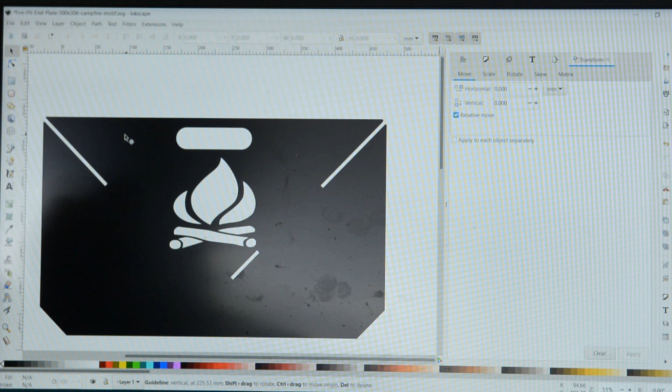It's got a cutout for a little flame, just gives a light through the end and also gives a bit of air in the end. These are the slots for the tangs on the sides to fit in, and this measures 500 by 306. So there'll be 2 of these the same, and I'll just show you now what the sides look like.

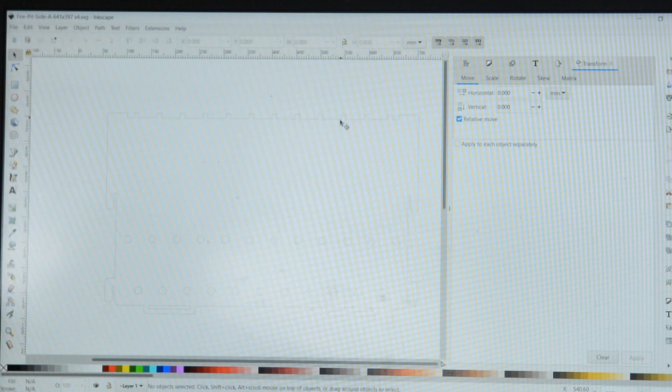Now this is the side. One side has got these slots in the bottom, and the other side plate has got a finger that actually goes in those slots, so they lock it in. And we have a row of holes which will be air holes above the grate that fits in here, and this is a row of air holes below the grate. And you'll see across the top this little castellated section that locks into the grill, and I'll show you that.

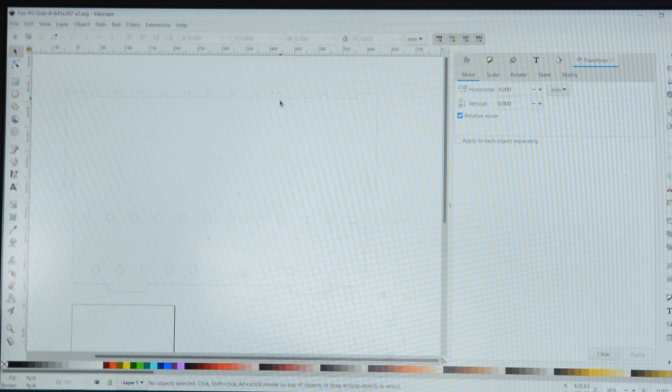Alright, now this is the other side, and it's only got one little finger on each side, and it has this little piece on the bottom that fits into the slot on the other side. The air holes are the same, and the castellated top section is the same, and it's what locates the grill. This is the grate, and the grate is 580 long, 150 wide, and it's got a series of slots in it. And as I showed you on the side, this fits in between those 2 rows of air holes.

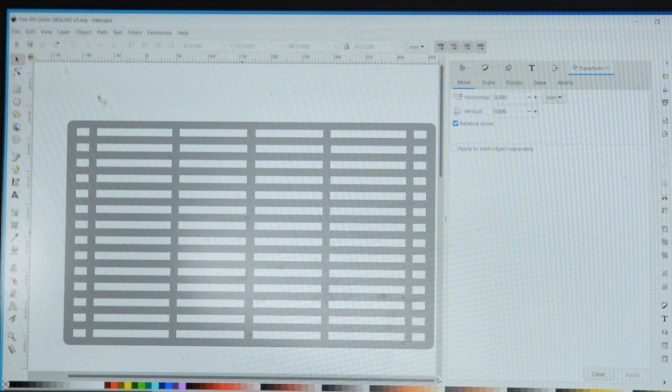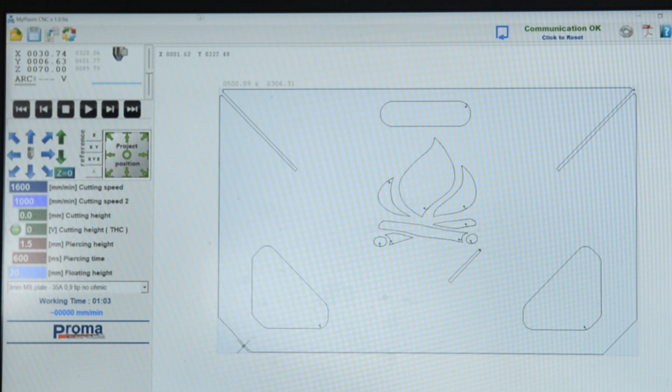So I'll just bring the first one into the software that we're going to be using, and this is the MyPlasm software that I use to run the plasma table. This is the end plate, and it's size 500 by 306, and these little dots and lead-ins tell me where it's going to start the cut from. It'll cut each of those in turn, does all the internal cuts first, and then it goes around the outside and cuts out. And I've got to cut 2, so I'll just cut 1 to start with and just confirm the sizing, and then we'll go and cut the rest.

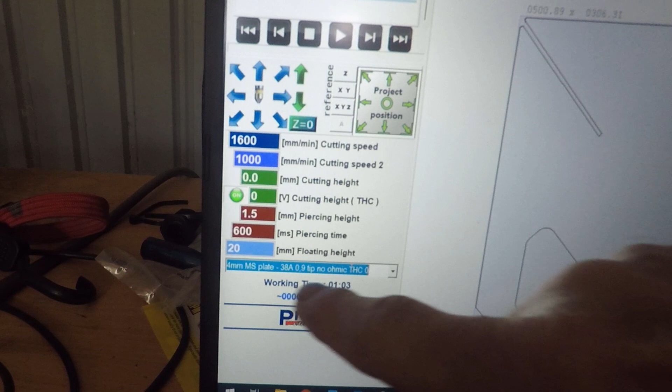And these are my settings for this first end plate, 1600 millimeters a minute. The second cut, which is the slowest speed for a hole. Cut height is set to 0 because that's the clearance I'm using on the torch. And I've got it set here at 38 amps on the cutter. And we'll hit the start button and away we go.

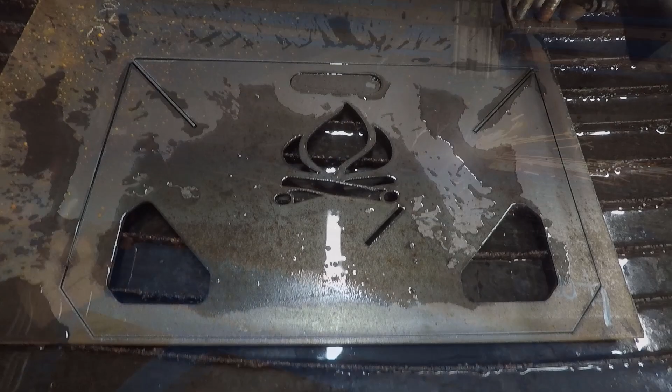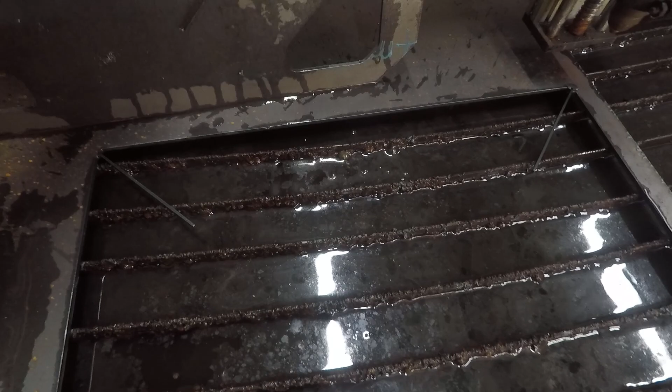And there's the first end plate cut out. I can grab that. So, look at that. Now there's the end plate. And we'll get on and cut all the others out, and I'll show you how it looks when it all goes together.

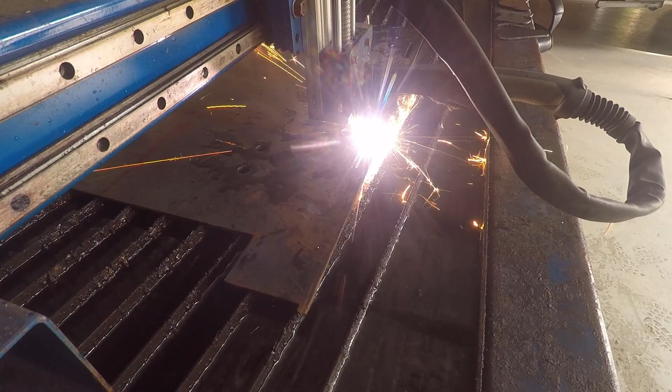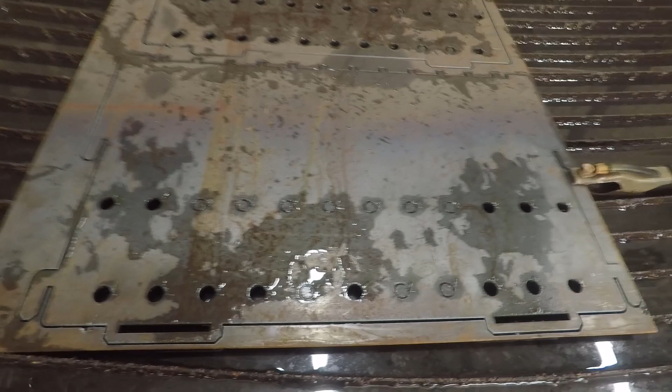So these are the two side plates. As you can see, this one here has got the little cutout, and this other side has got the little finger that goes in it. So I'll just lift those out of the table. I've got to put a new sheet on to cut the last little piece out, and we'll get it cleaned up.

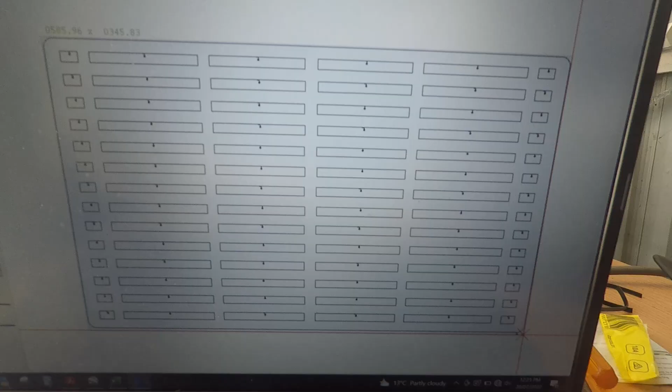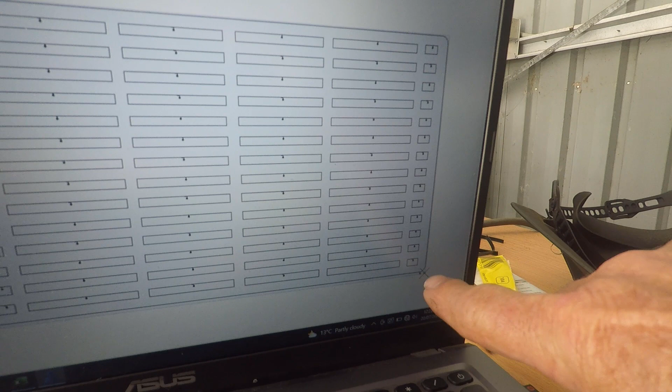Okay, so the last piece to cut is this grate that fits in the bottom, and it's 585 by 345, and settings haven't changed. So I've lined it all up. I told the torch where it is in this bottom right hand corner over here. So that's where the torch is. So yeah, just a matter now of hit the start button and last cut.

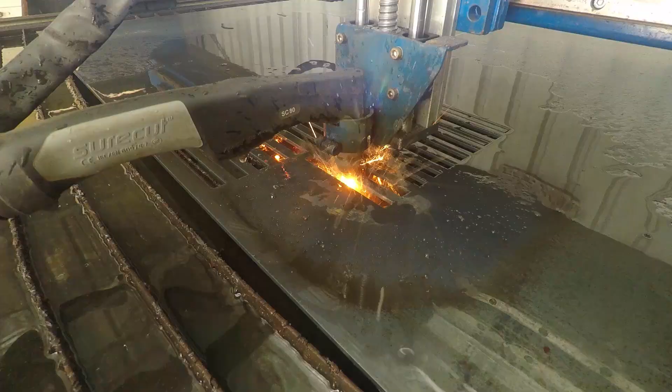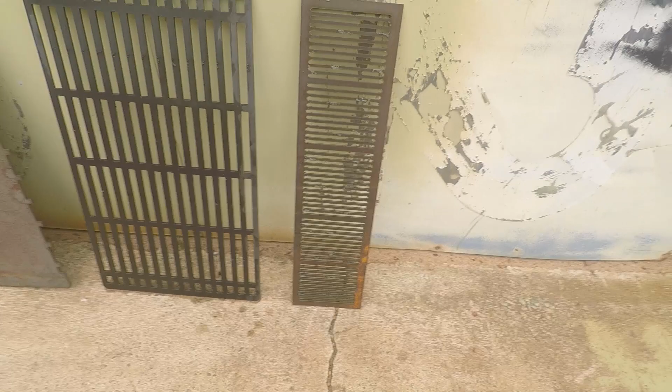And there are all the 6 pieces cut now, your 2 end plates and the 2 side plates, and this is the grill plate that fits on top, and that's the grate that goes in the bottom. So I'll get them on the bench, and I'll give them a clean up, and I'll show you how it looks all assembled.

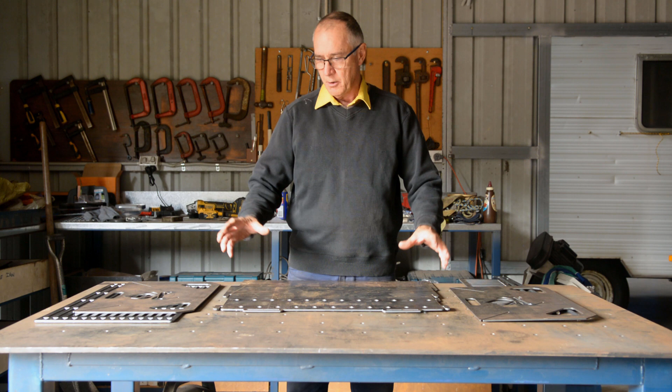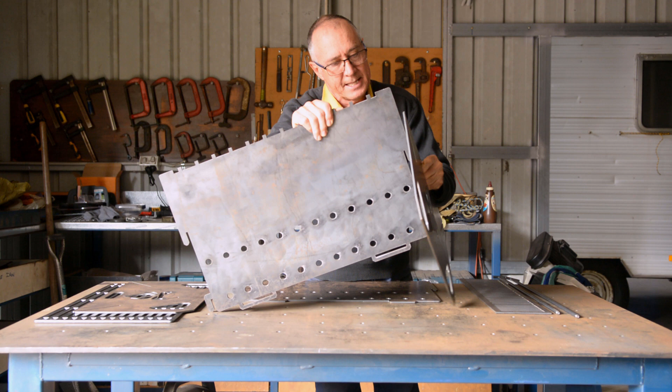So now that the 6 pieces of the fire pit are cleaned, ready to go, I'm just going to show you how to put it together. It's actually quite easy. As I said, one side's got the 2 fingers on it, and it's got the slot for the finger on the other side. So you take the end plate that's got the 2 slots on it, and it's just a matter of putting that in there, dropping it in. Do the same on this side. So you just drop that in there.

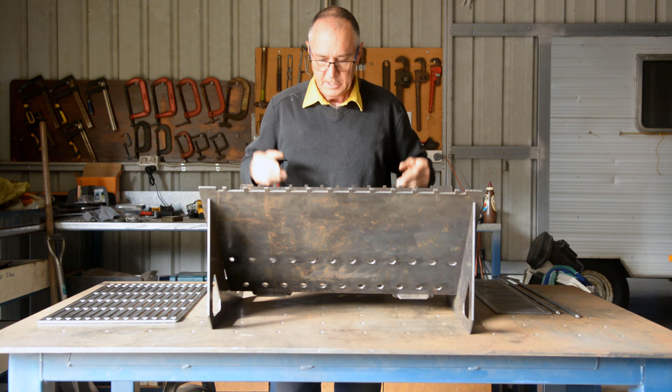Now this second plate has these 2 little fingers, I guess, and I only got the 1 slot on the side to go in here, and the finger slot in the bottom. And then the fire grate sits in between these 2 rows of holes. What I've made is these 2 long skewers, and what they do, I'll just turn this around for you. Sorry about the noise.

You see on the end, these 2 holes here happen to be the perfect height to rest the grate on. So I've made these skewers, pegs, and if I put them, without dropping it, through here and out the other side, and it's got a little T on the end to stop it falling out, do the same on this side. Gives the fire grate something to rest on.

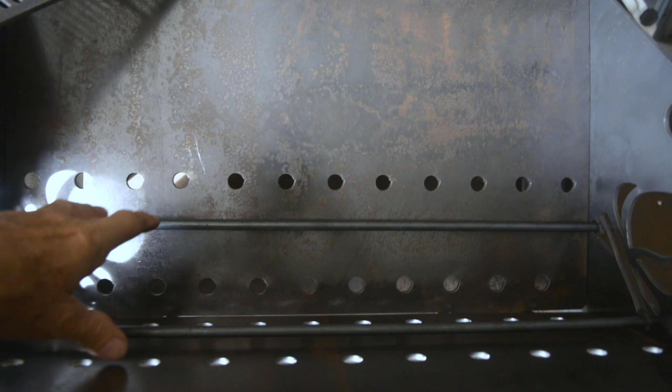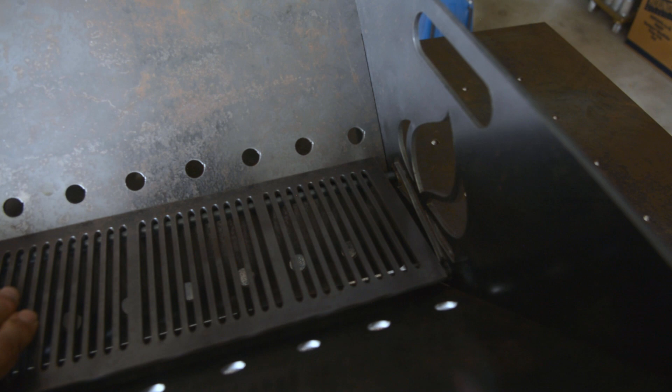So I'll just bring the camera over and just show you how that fits. And these are the 2 skewers, I guess you call them. They're 10mm mild steel. And then if I can do this one-handed, the grate lays in there, can't go anywhere, and it's firmly held by those 2 pegs. I guess in another version I might put them crossways under here, but at the moment they just happen to work out perfectly.

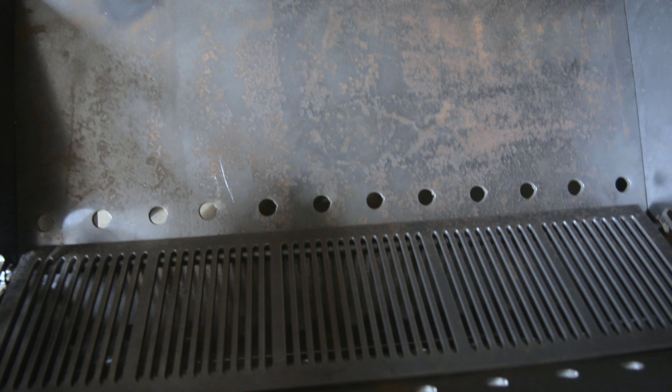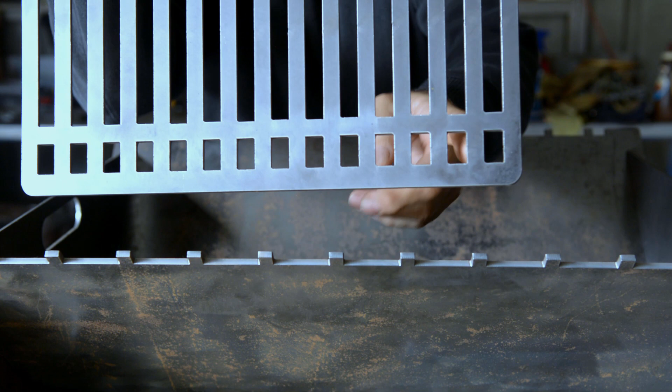And the last thing to do is to put the grate on the top. As I mentioned earlier, these pegs line up with these slots in the grill. So when I put it on there, they basically lock into these slots. So the other side, this can't fall off.

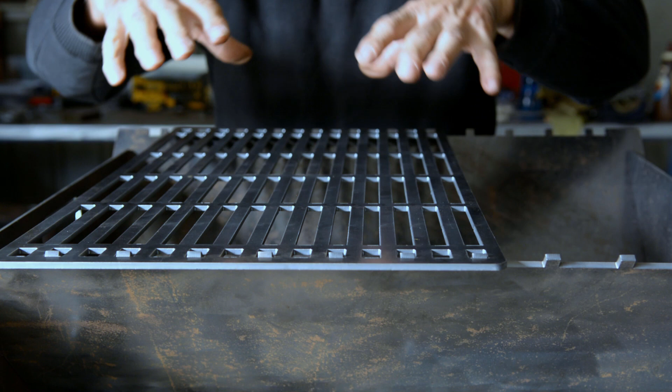So basically it can move a tiny bit, but it's not going to fall off, and this can be positioned anywhere along the length of the side, and the customer wanted it to just cover half of the actual fire area, so you can still put a bit of wood in if you wanted to, and you can cook on the top.

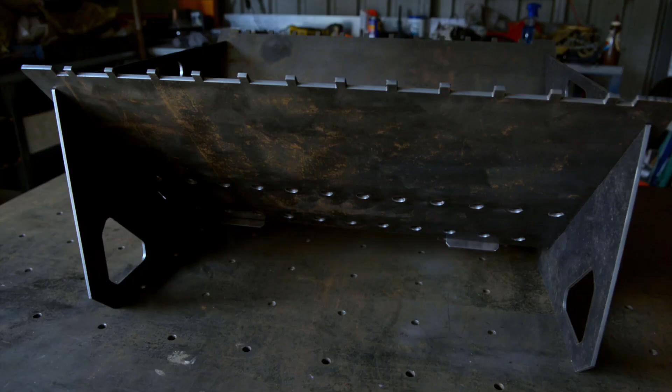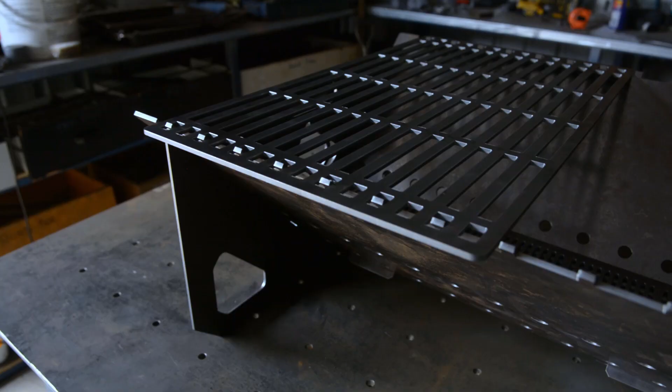So that's the fire pit. That's the big one. We'll have to think of a name for this one now. It's quite a big pit, and yeah, I'm pretty sure the customer's going to be pleased with that. He wanted a bigger one than the middle-sized one. All he's got to do now is take it with him and get a fire happening in it.

Well, I'm really pleased with the way the fire pit came out. As I said, this is now our largest version we've made, so we've got now 3 sizes. There's a little bit of design that went into working out these little pegs to line up with the slots in the grill, and a bit of my high school maths came back to haunt me, so it's a good thing.